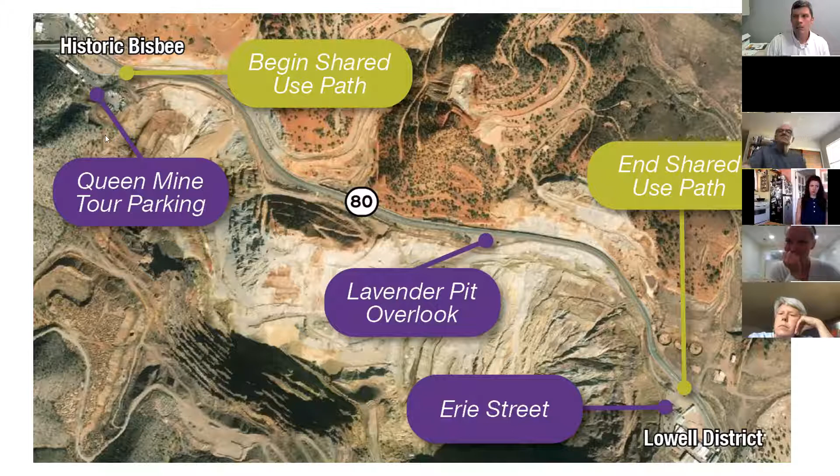Just an overview of the study area we are looking at here, between historic Bisbee at the west end, and then along SR80 here at the east end near the Lowell district - this is Erie Street. For orientation, this is a lavender pit overlook, and here at the west end we have the Queen Mine tour parking.

This project has been looked at a number of times over the years, including in the most recent Bisbee Area Mobility Master Plan that identifies a network of shared use paths. This is one element of that overall master plan, one of the core pieces, really providing that connection between different areas of Bisbee, the historic district and the residential areas to the east.

The pathway can also become part of what is called the Sun Corridor Trail. When ultimately constructed, it will extend all the way from Douglas to Las Vegas, mostly on its own separated facility, and become part of the regional and statewide network.

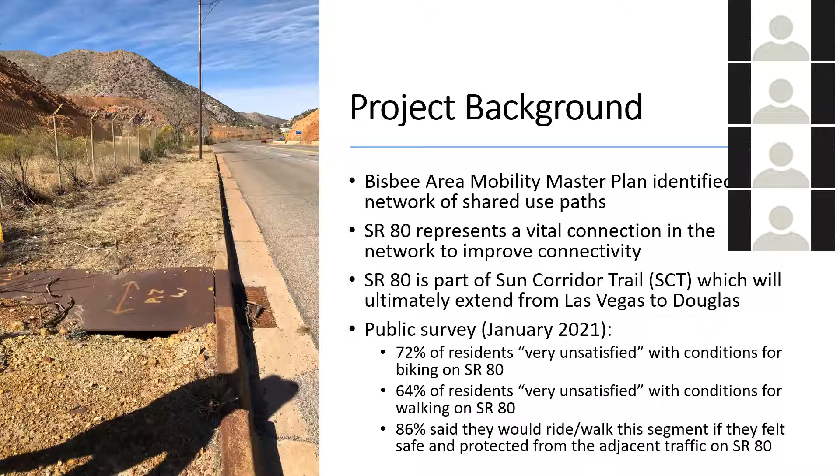Back in January of this year, we had a public meeting that some of you may have been on, where we initially talked about what's important, what are some of the initial concepts we should move forward with. We had a public survey - 72% said they were very unsatisfied with current conditions on SR80 for walking or for bicycling, 64% very unsatisfied with conditions for walking, and 86% said they would ride or walk this particular segment if they felt safe and protected from the adjacent traffic on SR80.

So taking that feedback, we have gone through and fleshed out a couple of concepts for consideration. The process we followed was first looking at what the current conditions are, second talking about that with the community back in January, and now here we are preparing concepts and bringing that back to you for input. Based on the input we receive this evening, we'll refine that concept and then publish our final report, which is due to be completed by the end of June.

It's important to note that after that final report is completed, the stakeholders - the city, the partners - really need to identify funding. We don't have funding identified within this grant for design and construction; that is a subsequent part. The purpose of this study is to help us identify what is a concept and how much money do we need to find. Many refinements can happen during that design - we're not going to get to the level of detail of defining every piece of this pathway. We're presenting the concept, ensuring that we have community support and that the community wants to move forward, and how much money do we need to identify to begin the design and construction process.

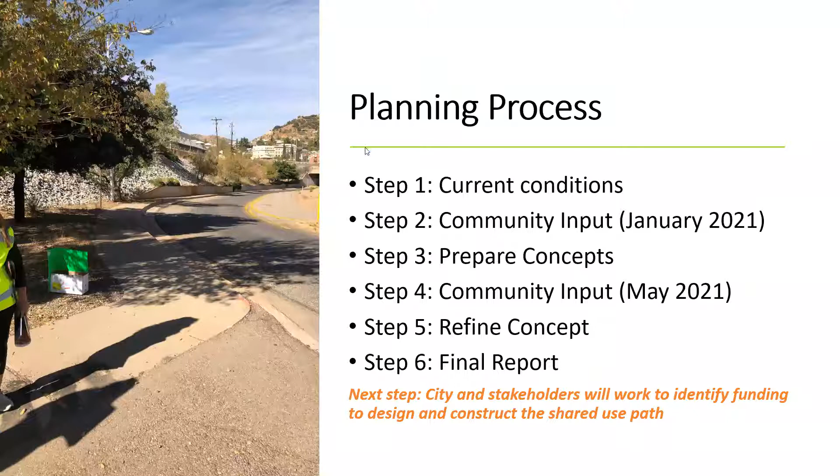Let me check. Okay, I think I see a message there.

Some considerations when looking at our concepts: number one, provide a facility that's safe for pedestrians, bicycles, and vehicles. We want a facility that provides connectivity, with a good terminus where people can get on the pathway at both the beginning and ending points. You can't just start the pathway out of the blue; people need to be able to access it.

We want it to be comfortable. If people are comfortable on it, they will use it. We call it the 8 to 80 rule—we want it to be comfortable for those who are age 8, as well as those who are age 80.

The pathway also provides aesthetic and cultural opportunities. We can introduce public art done by local artists. The concept for the separation in some portions is a concrete barrier, and we can put artwork on the back of that barrier on the pathway side, done by local artists, to bring that local Bisbee flair. We want the pathway to promote tourism and economic development—something the community can be proud of, something that can be advertised, something that tourists can say: I want to go to Bisbee and bring my bike and participate in the local community.

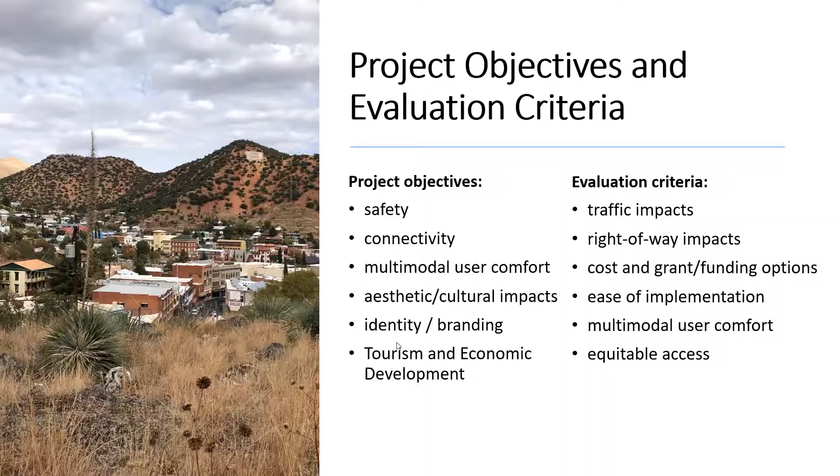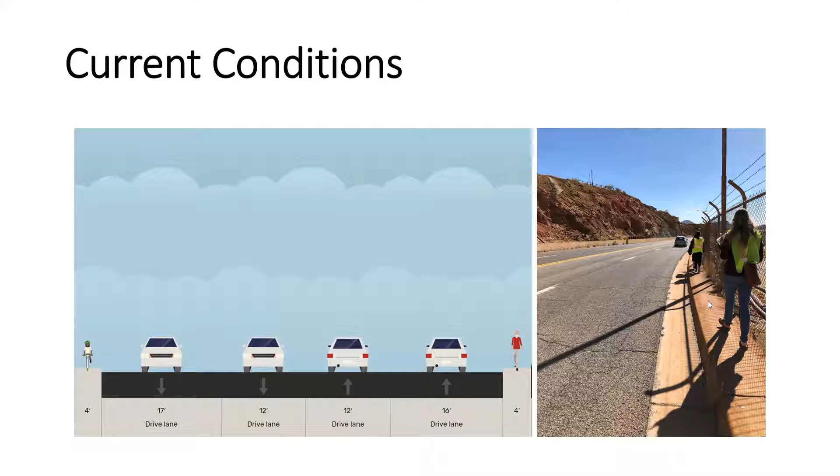As a review of our current condition, you can see in the photo 4 lanes, with very wide outside traffic lanes—generally 16 to 17 feet on the outside lane and 12 feet on the inside lane. The walk area is generally about 4 feet wide.

We have proposed a couple of concepts, which we call Concept A and Concept B. Both concepts are identical between the east end at Erie Street and what's labeled in Google Earth as Dart Road—the Queen Mine Tour entrance area. So both pathway concepts are essentially identical through that segment, and we have some options at the west end between the Queen Mine Tour entrance and how we connect to downtown.

Throughout the pathway, there are segments where we have more space within the paved area, allowing us to provide a horizontal barrier or horizontal median for separation between the pathway and vehicles. In other areas where the width narrows and we don't have room for that horizontal distance, we propose more of a vertical barrier, which requires less space and room. That's why you'll see two different spacing concepts within the plan.

Both concepts require converting traffic lanes to accommodate the shared use path. The concept we've proposed converts the 4 lanes to 3 lanes: 1 eastbound lane, 1 westbound lane, and a 2-way center left turn lane. We'll describe a bit more some of the advantages to this configuration.

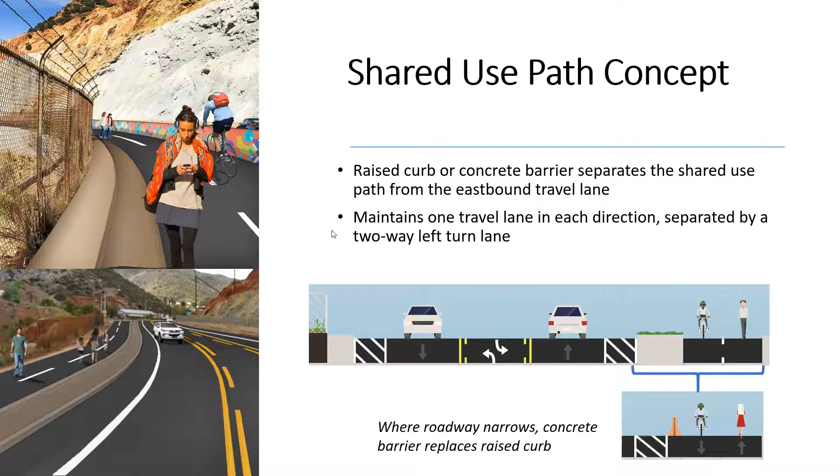Some of you may be wondering why the 3-lane configuration. That provides some benefits, both from what we call a traffic calming perspective.

When we take a roadway and visually and physically narrow it, vehicles feel like they need to drive slower. That's an important element of providing a facility that people are safe and comfortable walking along. So providing that 3-lane conversion does help visually and physically narrow the roadway. We get people more inclined to drive closer to 35 miles an hour instead of 45.

In addition, the 2-way center left turn lane provides some room with our paved shoulder on the outside. If a vehicle breaks down, or if an emergency vehicle is coming behind, a vehicle can pull over, and the 2-way center left turn lane allows enough room for an emergency vehicle to go around the vehicle, so we don't have any impact to emergency services.

The two-way center left turn lane also provides turning room for vehicles that need to turn into the FMI driveways. They're rare—those driveways are generally closed—but it does provide that opportunity into the FMI driveways and also into the Lavender Pit overlook area, where it is hoped that as we improve that area, it will become more of a tourist attraction as well.

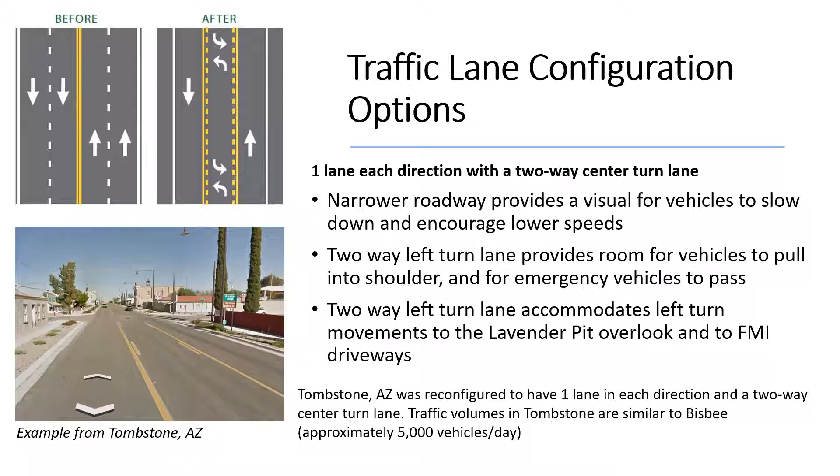When we talk about lane repurposing, one question that has come up is the possible detrimental effect to the movement of motorized vehicles. The way we measure that in ADOT's world is a report card system called level of service—A is excellent service, going B, C, D, down to F. With the proposed lane reconfiguration, anticipation of current traffic and a modicum of future growth, and the potential for rearranging activity at the international border, the assessment is that we would not see a significant decline in level of service, that drivers of motorized vehicles are not going to be hemmed into an untenable traffic jam to the benefit of bicyclists and pedestrians.

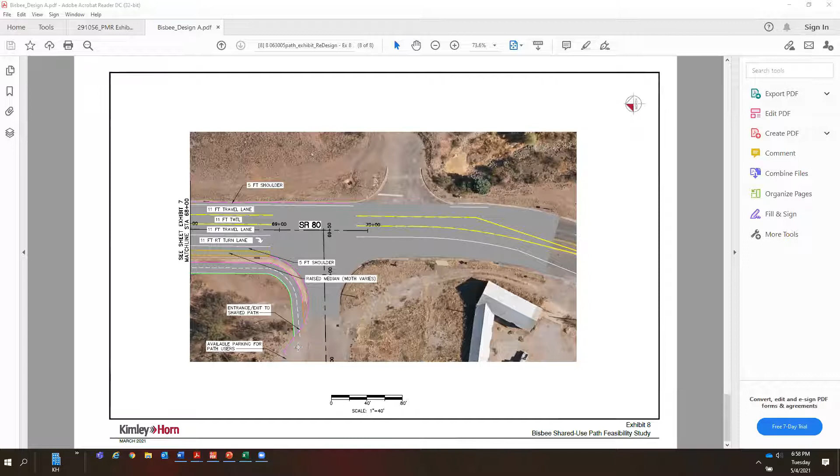So you can see here, this is down in Erie Street, and you can see our 3-lane configuration. We start at Erie Street, vehicles can come up and make a left turn into Erie Street, both as they head up north into the pathway, or west of the area. You can see our pathway here that we're proposing will end at Erie Street. Once they get into Erie Street, there could be additional signage, taking you through where the building facades are, but I think that'll be a great connection to introduce tourists to that area.

As we move to the west, you can see our pathway configuration goes from behind the back of the curb, allowing a right turn lane here into Erie Street, but then we come up and get back in between the existing curb lines on SR 80. This hatched area is the raised median I talked about earlier. Then the cross section narrows down where we don't have room for the concrete median, so we transition to the vertical barrier section I showed you earlier, and continue that section for several hundred feet.

One lane in the eastbound direction, the two-way center left turn lane, and one lane in the westbound direction. Actually, through this section it's narrow enough that we don't have the two-way center left turn lane, because the roadway is narrower as we go through here. So there's a section where we just have one lane in each direction.

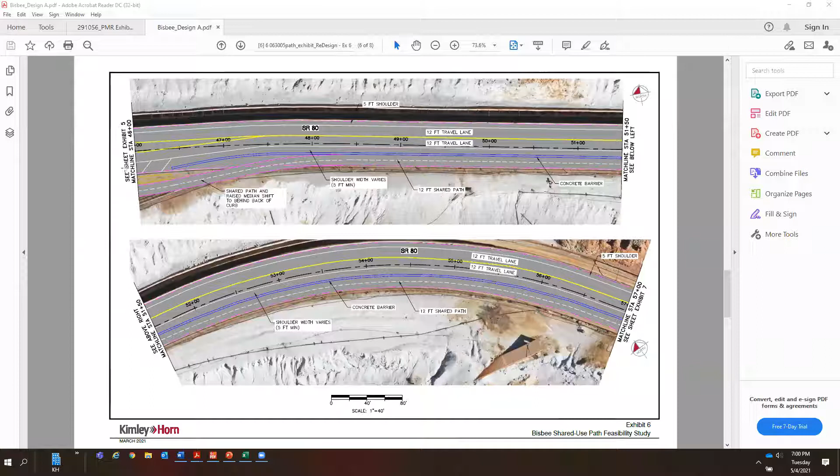But then we get up to the Lavender Pit overlook area, and we do gain our width again. What we are doing is bringing the pathway up out of the street and into the Lavender Pit. So you can see the Lavender Pit area, we have the pathway, and then we have this two-way left turn lane section with one lane in each direction.

And then what we're proposing is some... you know what, Rebecca, I realized I'm not showing the illustrated version here with all your pretty artwork, but we'll find that. She's like freaking out, she said, Brent, I just did all that work.

But we showed in the concept that's in the report, you'll see there are some landscape illustrations to spruce up this Lavender Pit area.

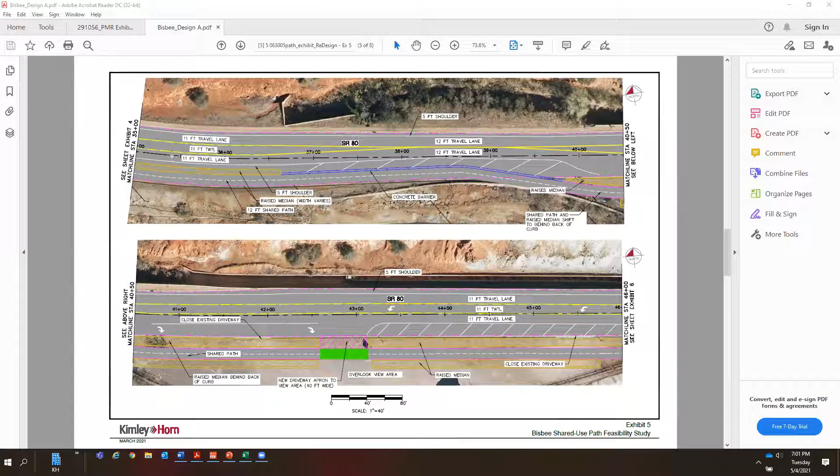As we leave the Lavender Pit, you'll see we have a right turn lane into the Lavender Pit. Then we continue on, and get back into behind the curbs, continuing up that section. We have our left turn lane with one lane in each direction again, as we continue on towards historic Bisbee. We maintain that section.

You can see here where we have some of the driveway openings to access FMI. We have a break in that median opening, and we would make sure those are well signed. We've talked with FMI about a procedure they would use when making movements into that area, turning on their flashing lights, and using a guide vehicle if needed to make sure they can do that safely.

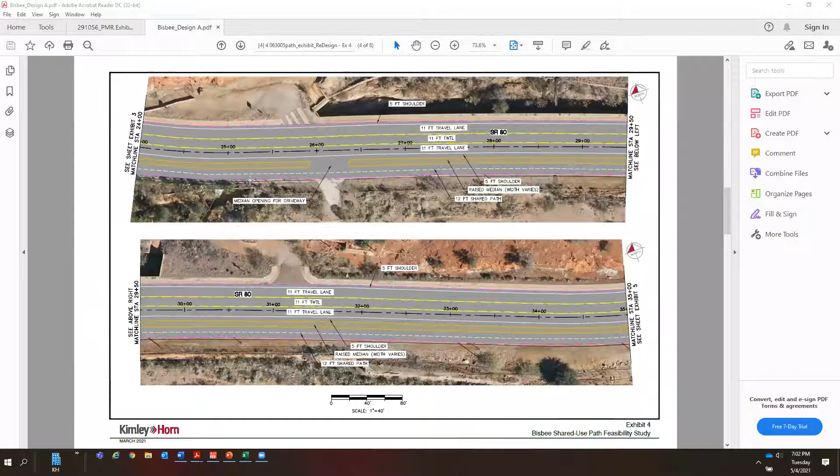We continue that cross section as we go up towards historic Bisbee, until we get into the copper mine entrance area. This is where we have two separate options. We'll describe option A, which is what you're seeing here, and option B, which essentially moves the pathway out of the traffic lane so we can largely leave traffic flow in its current configuration.

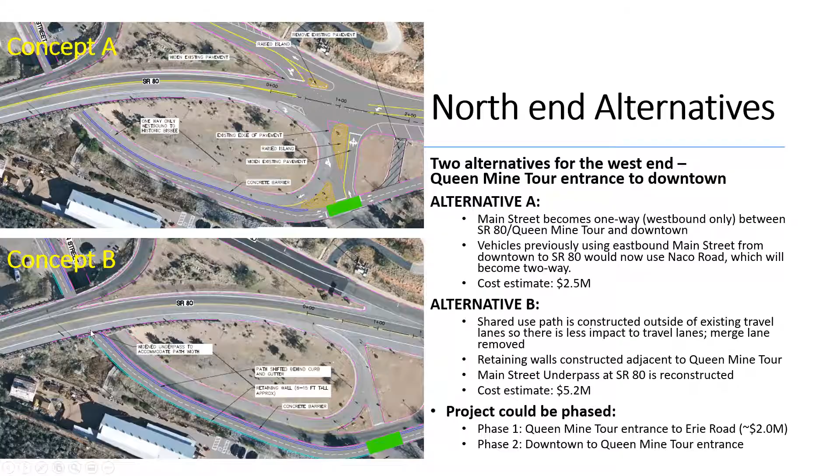Here's a blow up of concept A, and here's the blow up of concept B. I wanted to show what concept A looks like from a traffic perspective. This is where we shift traffic up onto Naco Road and it becomes two-way.

This 230 is the vehicles during a peak hour that would be making that movement - 230 vehicles during that peak hour. We got that number because we had people, including Megan, who stood out there for us on a Wednesday evening and counted traffic during the evening commute.

We recognize that in Bisbee there are special events, like the stair climb event, that bring a lot more people to town. This simulation does not represent those peak hour conditions. During those events, you would likely need some special traffic control to better manage that traffic.

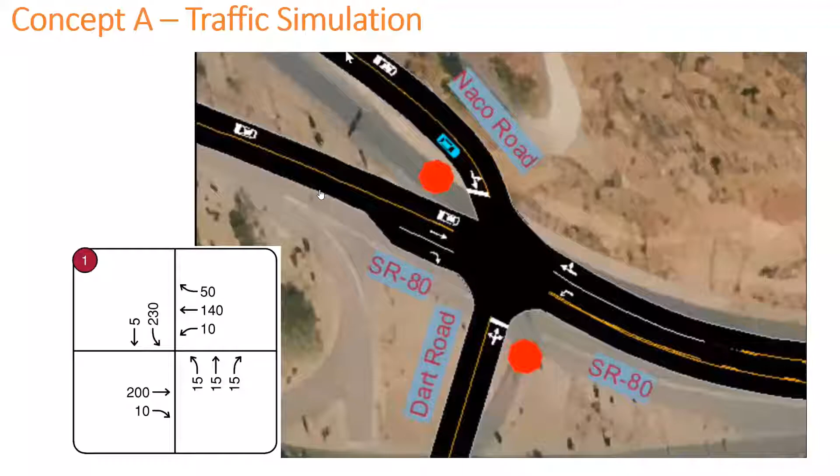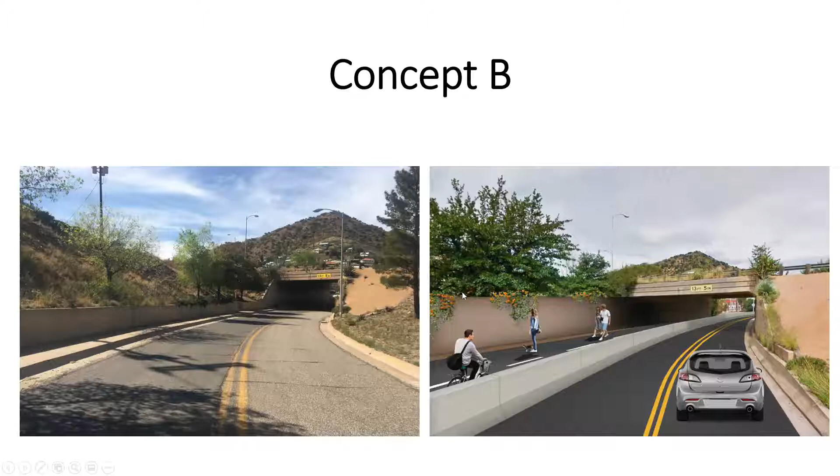Right, wanted to talk a bit more about concept B. As I mentioned, the objective is to minimize impact to the existing traffic patterns. We maintain two-way traffic on Main Street, but construct the pathway outside of the existing traffic lane. Concept B would require a fairly significant size retaining wall as we carve out more of this slope, and that would require a reconstruction of this bridge to widen it for bicyclists and pedestrians.

So you may be wondering, what does that all cost? For concept A, we've done a fairly thorough cost estimate, though at the conceptual level, considering improvements for the roadway, barricade, concrete work and everything. We're estimating that in 2021 dollars, that's approximately $2.3 million. By 2024, after getting funding and accounting for inflation, we're estimating it would be closer to $2.5 million.

You may wonder, where's all that money going? Here we've identified some of the major cost components.

In order to restripe the roadway and reconfigure it, we are assuming there is an asphalt treatment so we can have fresh pavement and fresh pavement markings. That's approximately $145,000. The other bulk of it is concrete work, both the median and the decorative pavement, as well as the concrete barrier.

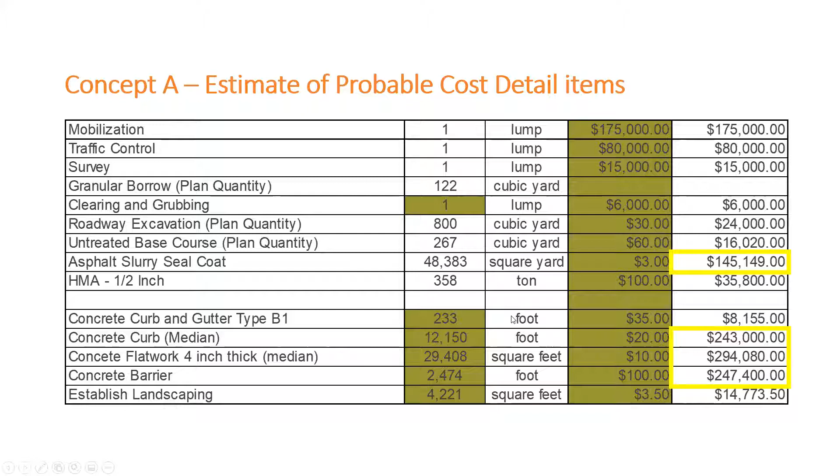And then you have other items: traffic control needed during construction at $80,000, mobilization for the contractor to get his equipment out there, and doing some roadway excavating for the new pathway and paved areas. Adding that all up together, we get $2.3 million.

Concept B is the one where we have to construct the retaining walls and reconstruct the bridge. In today's dollars, we're estimating that at about $4.7 million, and in 2024, it's about $5.2 million. So the difference between the 2.3 and the 5.2 is the retaining wall and the reconstruction of the underpass at SR80.

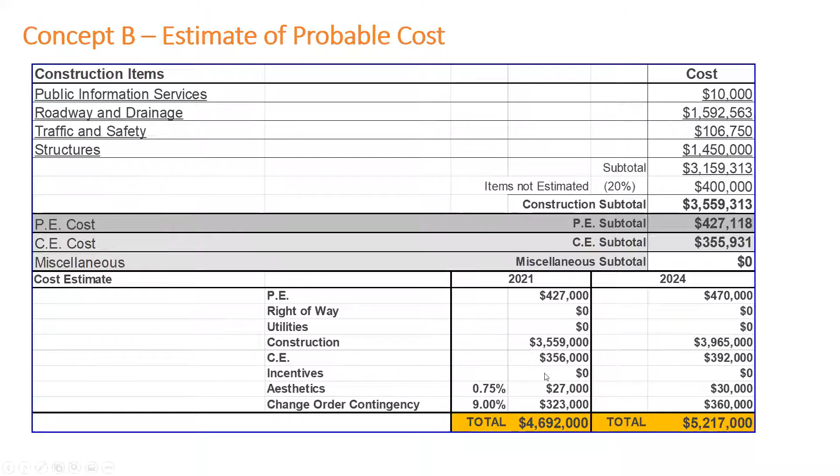As many of you are aware, we've had a survey open for the past week or two, looking for public comment. That survey will remain open for another 2 weeks, after which we'll compile the results. But I did want to tell you what we're seeing already within that survey.

The first question asked, to what extent do you agree with the shared use path concepts that are presented? The good news is the bulk of us strongly agree. 101 out of the 190 respondents are supportive of either option A or option B.

Only 11 responded disagree, and 53 strongly disagree. So we recognize there are a variety of opinions, and many people are concerned about the impacts of traffic and such. The second question asks for a preference between option A and option B.

You can see here, we have option A at 44 of the 190, option B at 78 of the 190, and then do nothing - they don't want the improvements here - at 65 of the 190. So kind of a mixed bag again in terms of the improvement.

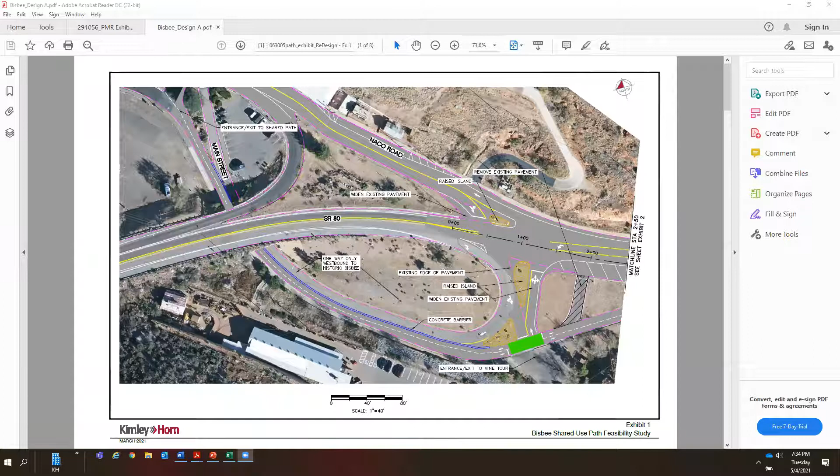I'm Robert, and one question that occurred to me when talking about surfaces—something I was concerned about earlier—has to do with bicycle speed and, well, bozos, since we have our fair share of them. But keeping the pathway clean is always an issue for road shoulders and bicyclists, since debris ends up in the roadway. I wondered if that was something you'd given consideration to.

Yeah, maybe Jesus can speak to that. The pathway will be 12 feet wide, which is sufficient for a standard size street sweeper to enter. We'd want to provide entry points for that, and make a regular arrangement or agreement for it to occur—quarterly or whatever frequency is required. It could be accommodated by a standard size street sweeper and wouldn't require special equipment.

It's my understanding that if this gets constructed, it would be the city's responsibility for maintenance. So it would be something we'd put on a preventative maintenance schedule.